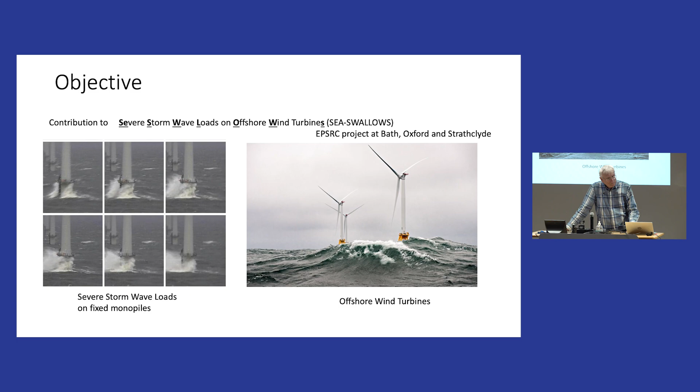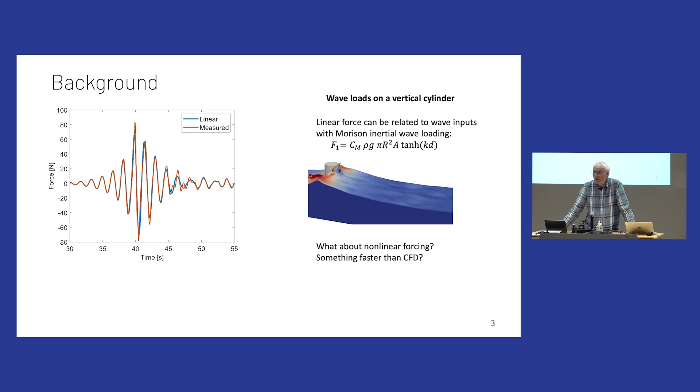But that's not quite everything that one wants. There's nonlinear terms, nonlinear forcing, and we're interested in a process which is faster than CFD. I mean, the classical problem for CFD to solve is flow around a cylinder, and it'll do a very good job these days. But the problem is you need large amounts of computing and you need to be patient. So what I'm interested in is coming up with a much faster recipe.

Why do the higher order terms matter? Well, they matter because of structural dynamics. So if you look at the picture on the left, the linear force time history in blue and the nonlinear terms add on. They make the transitions faster, they make the peaks a bit higher. They don't look on the left as though they do that much, but if you look at the frequency content on the right-hand side plot, that's a force spectrum as a function of frequency, you can see the wave peak well below the shaded area.

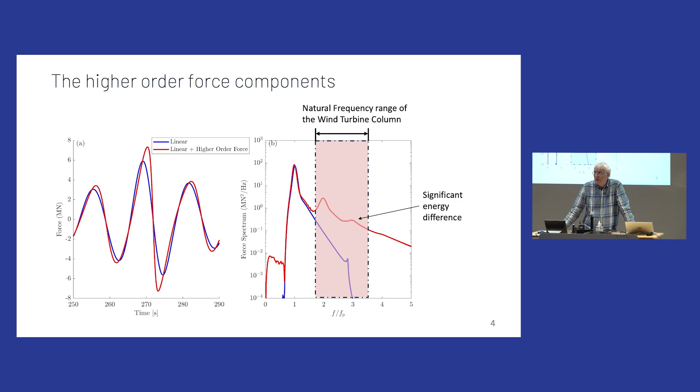The shaded area is where the resonant frequency of the turbine columns are, typically somewhere between 2 and maybe 4 or 5 FP. And you can see some spikes in there. Those are the nonlinear terms that come through from the Morison inertia term when you do the calculations properly, which is what we're trying to do. So you're worried about fatigue as well as extreme environmental overload for columns. At least you should be.

But the key thing to understand is that for the fixed offshore wind problem, turbines and turbine structures have very little structural damping. So if you hit them, they vibrate for a while, and that's clearly going to use up some of your fatigue life in the steel work. And there's evidence from oil and gas from a long time ago that the best analytical models for ringing responses are inadequate. And that's been the case for a long time now.

Okay, so the aim is to take a crude linear representation of the free surface and transform it into as close to fully nonlinear force time history as we can get. And particularly, we want to do this quickly, and we want to do it accurately. We don't want to do CFD, because CFD takes hours on a big supercomputer. We want a force transformation which will give me the answer essentially within 0 computational time.

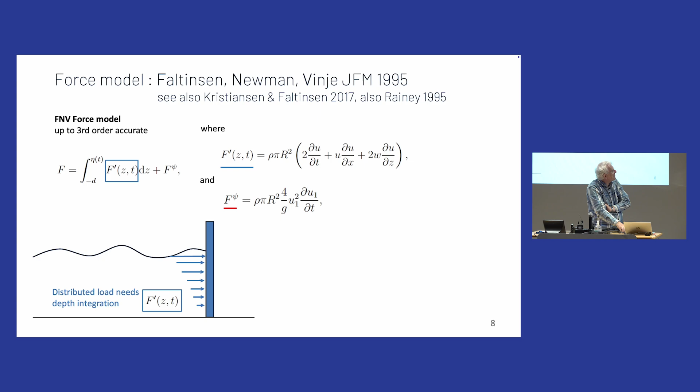Okay, so the depth integral term, the term in blue, needs to be integrated up the column. And the point load obviously is applied to the free surface. Now, the difficulty with most of this is that we can measure what the free surface is doing very easily.

You just stick a wave gauge in the tank and measure eta and then d eta by dt and anything you want from that. But it's actually quite difficult experimentally to measure internal wave kinematics. It can be done, but it's expensive and time consuming. And it's relatively computationally intensive to work them out below the free surface. And apparently, in order to work out the integral of f prime, I need to do a depth integral.

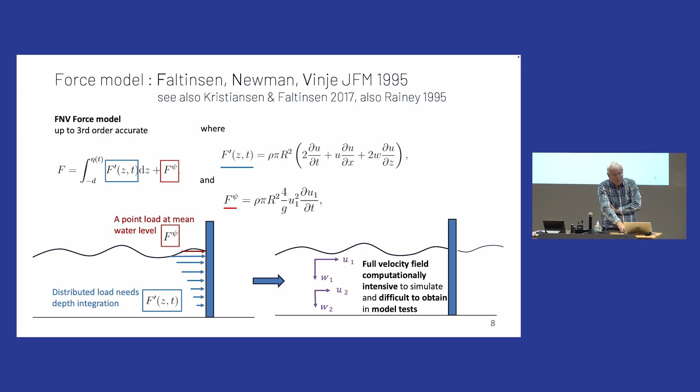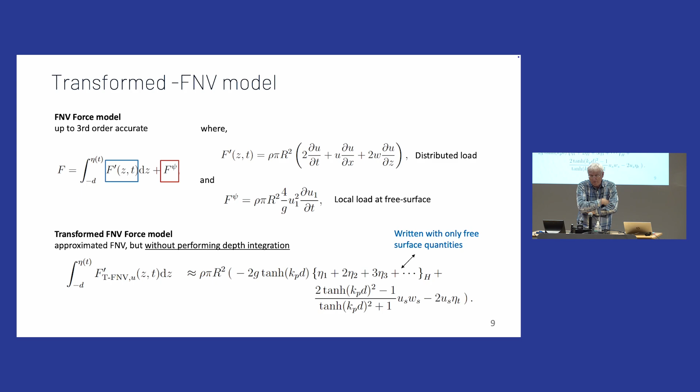So that's the point of the work that Tim Tan and I did. We're trying to eliminate the need for that depth integral term. Okay, that's the answer we came up with, and don't worry about it. It looks horribly complicated, but the point is it is simply properties written at the free surface. So the depth integral is effectively done analytically. And I'd like to explain how that's done.

Okay, so we've got two pictures here. The picture on the left is completely undisturbed. The column is in the middle of the domain. And I've shaded in blue the patch of water beyond the column. The picture on the right shows flow past the column associated with a wave disturbance propagating by. So U of z distributed vertically drives eta of x and t.

Now that's really important because I can use mass conservation. Any fluid that goes in past the column into the right-hand part of the domain, any U is automatically directly associated with motion of the free surface. If you push volume in, the only place it can go is move the surface up and down beyond that point. So a depth integral of U dz is related to the motion of the free surface beyond by simple mass conservation. What goes in one way must come out somewhere else.

And that is the key to what we've done. It's a very, very simple property, but it turns out to be very useful because we know a lot about what the surface is doing. We know much less about the detailed structure of U.

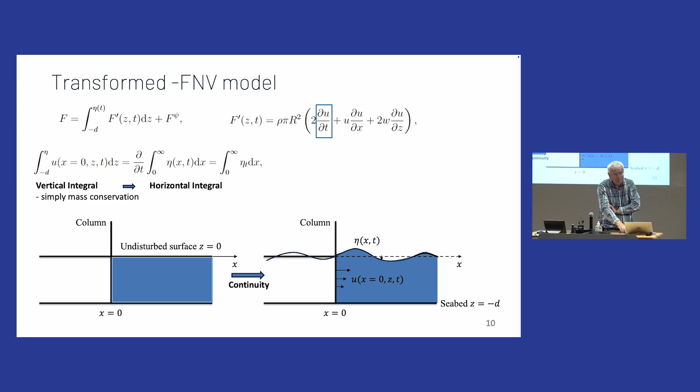So the integral of U dz is equal to d by dt of, so it's the vertical velocity of the free surface, essentially. We don't actually want the integral of U, we want the integral of du by dt, so the fluid acceleration, so we simply differentiate the equation on the left. So d by dt of the integral of U dz is the term I actually want, du by dt dz integrated vertically, plus an extra correction term.

And that is simply the vertical acceleration of the surface integrated from the column out to plus infinity to capture all the wave field. And this simple transformation seems to pass people by. And it's really the key to doing these sort of calculations in an extremely rapid manner.

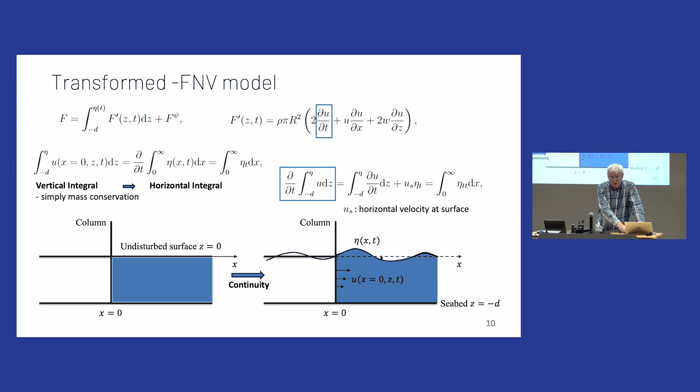Okay, so in principle, we can do this transformation. We know a lot about the surface, so I'm going to write the surface as eta in the middle of the screen. Eta is equal to eta 1. That's just linear. So if the linear surface is A cos omega t, that would be that term. Then there's the second order term, which is A squared cos 2 omega t. And the third order term, which is A cubed cos 3 omega t.

And those are the well-known Stokes bound harmonics. They make crests and troughs different shapes and so on. But their structure is very well understood. And if you look at the narrow-banded approximation, don't worry about the constants. We've got eta 2, the shape of this double frequency contribution, is equal to eta 1 squared minus eta 1 Hilbert squared. Who knows what a Hilbert transform is?

As a few of my students do anyway.

If you start off with cos omega t and you take the Hilbert transform, you simply get sine omega t. It phase shifts everything by 90 degrees. The great advantage with the Hilbert transform is it's a one-line command in MATLAB.

So if you look at eta 1 squared minus eta 1 Hilbert squared, that's cos squared minus sine squared. For those who can remember their school trigonometry, cos squared minus sine squared is cos 2. So by simply doing that operator, eta 1 squared minus eta 1 Hilbert squared, I get a second order term. I get my right second order term.

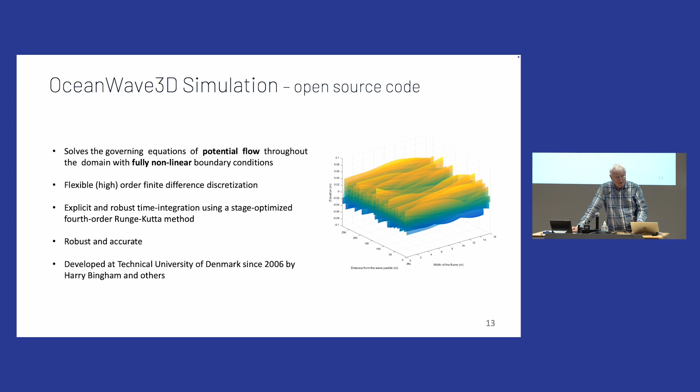Extremely smart mathematician. It's a beautiful code. It's extremely robust. It's very hard to break the code, which for a wave evolution scheme is quite an achievement. Its properties don't matter, but we've used it to infer internal kinematics so we can test our algorithms. I'll show you a few pictures like this. I'll go through them very quickly.

We have an equation at the top that I'm trying to model, and I'm going to compare the first term, which will be a numerical depth integral, to the various approximations in terms of my horizontal free surface formulations. The column on the left is finite depth, so it's KD about 1, so it's appropriate for a fixed offshore wind turbine.

KD 3 would be a big concrete platform in deep water in the northern North Sea. So we have in the top panels, the top pictures, the black curve is the surface elevation time history, and then the colored curves are different methods of approximating the various forces that come out.

So the first thing I'm going to do is compare the numerical integral over depth with a numerical integral horizontally along the free surface. And so that's the top. Basically the green line is an approximation, the red line is another free surface approximation, and the purple underneath everything is the exact numerical depth integral. You can see the top lines match really nicely.

Then we've looked at the horizontal integral minus the vertical integral as an error. So the error is about 3% of the peak force. And then the final one is to do the horizontal integral analytically to approximate that. The errors in that approximation are even smaller. So essentially, this validates the equation at the top.

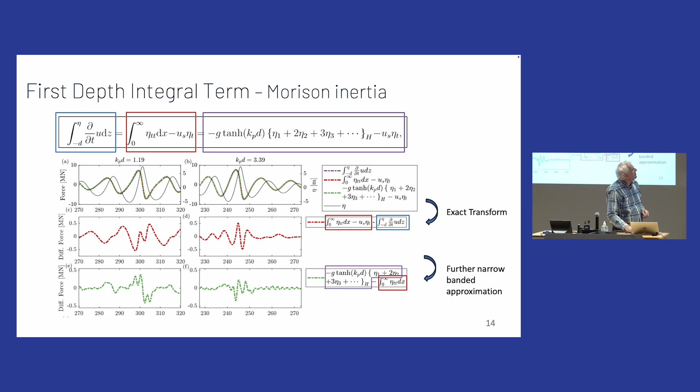There's other terms in the depth integral. There's this u du/dx, which is sometimes called the convective derivative term or convective acceleration. So it fires when there's a horizontal gradient of velocity. So it's a u du/dx, again, depth integrated. A few mathematical tricks based on unidirectional waves: incompressibility and irrotationality connect horizontal and vertical derivatives of velocity fields.

So I'll just show you the answer, that the depth integral of this term can be approximated in terms of a vertical integral of a term which is itself a derivative vertically. So that then becomes trivial. So I'm able to transform my unpleasant depth integral into another term which is only evaluated on the free surface. So that's the convective derivative.

I can also treat Rainey's axial divergence term. So w is the vertical velocity in the fluid column on the right-hand side, and du/dz is the vertical gradient of horizontal velocity. Exactly the same treatment allows me to write it in a very similar way. And then the pictures below compare the numerical integral with the horizontal or the free surface forms. Again, they match really nicely between modeling and the integration.

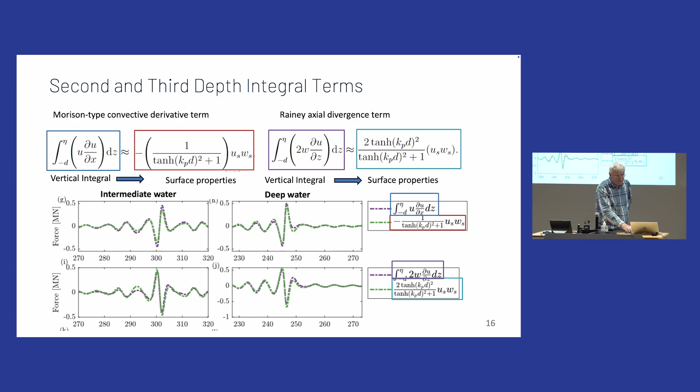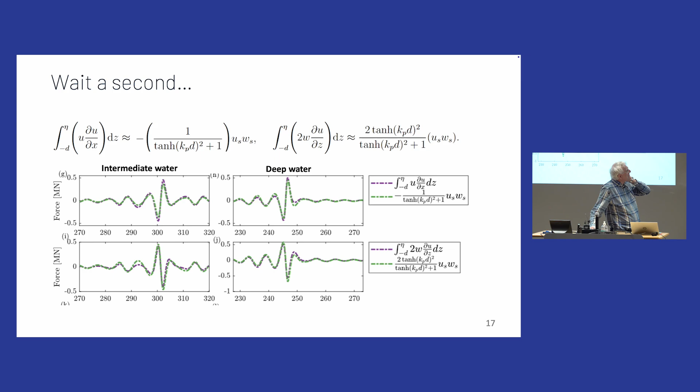But you might look at these and think, well, actually, the top terms are the convective derivative. The bottom terms are Rainey's axial divergence term. When Tim produced these numerics for me, I looked at them and thought, they look suspiciously similar to me. They're almost identical, but one's the inverse of the other. So nature's being kind to us.

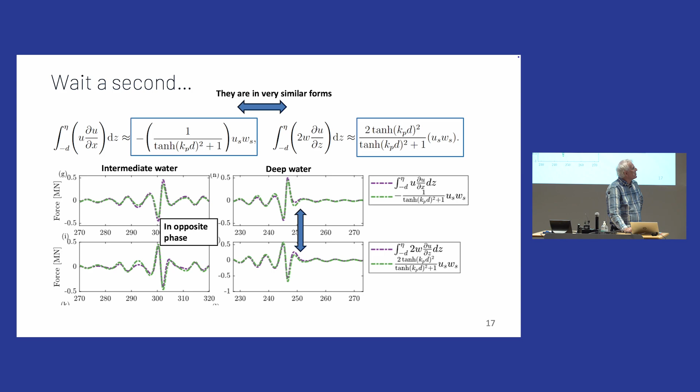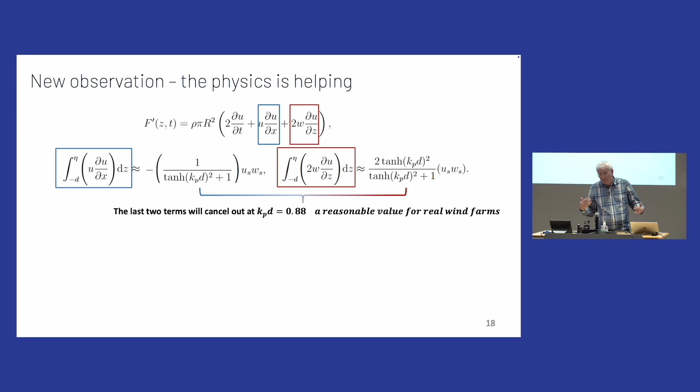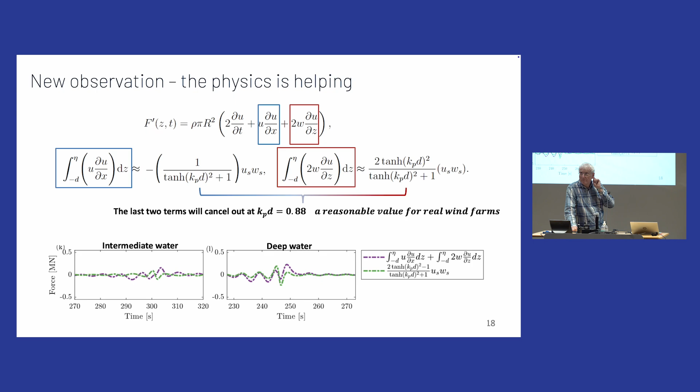Those two terms almost exactly cancel out in realistic water depths for offshore wind turbines, which is very convenient because it's a bit messy to play with these terms. If I don't need them, I can just throw them away. That's just a comparison to show the residuals to the left. The peak force is about 10 meganewtons, so my errors are about 1%, which is acceptable, I think, for engineering use.

Okay, so what we've been able to do is take the complete solution for the depth integral term, f prime, and express it completely in terms of free surface properties: the displacement of the surface eta and the horizontal and vertical velocity of the surface. So u_s is the horizontal velocity on the surface. Eta_t is the vertical velocity of the free surface.

At each harmonic above linear, the FNV forces are relatively larger than the same harmonics in the incoming wave field. Actually, FNV is as nonlinear as wave slope is, and wave slope is quite a nonlinear parameter. That's why the harmonics are quite large, and why the structural vibration induced is quite important.

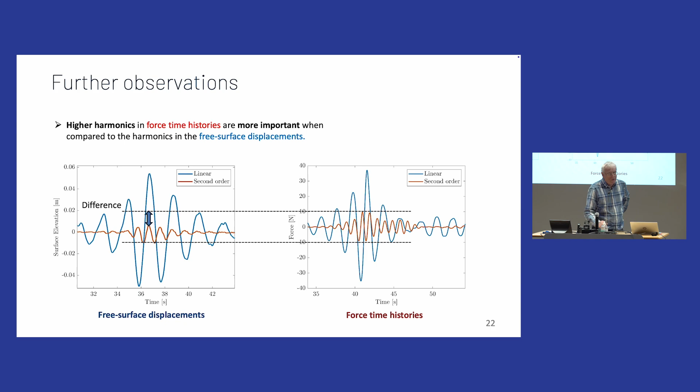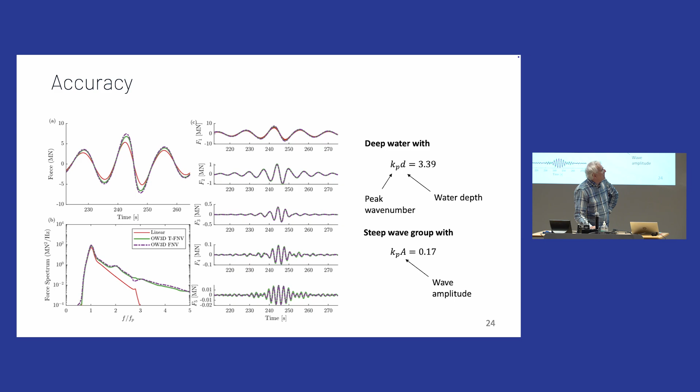That's a shallow water case. It works equally well for deep water, which is quite satisfactory. Okay, so this is the complete answer, at least 2/3 of the way to the complete answer, perhaps. The depth integral can be written in terms of motion of the free surface. So U throughout the column has been transformed to eta along the surface. And the only other bits to the left are free surface velocities. So U, W, and d eta by dt. Well, we know d eta by dt because we can get it from eta.

So how do I get my velocities to plug into this? It depends exactly what you're trying to do. If I'm doing a computation of the wave field, then I will have free surface velocities as part of my normal output from the scheme. So I would then know the velocity and I can then plug them into the formula to work out loads on columns.

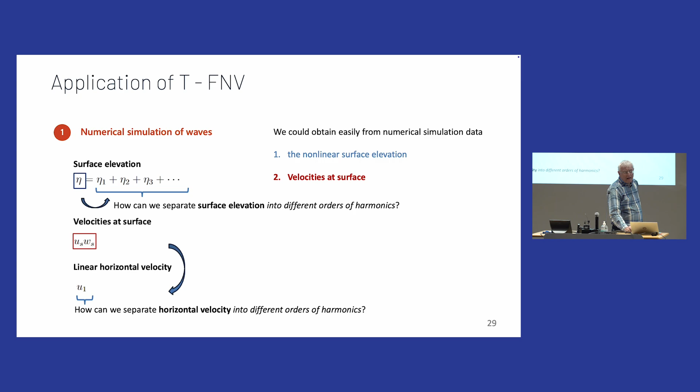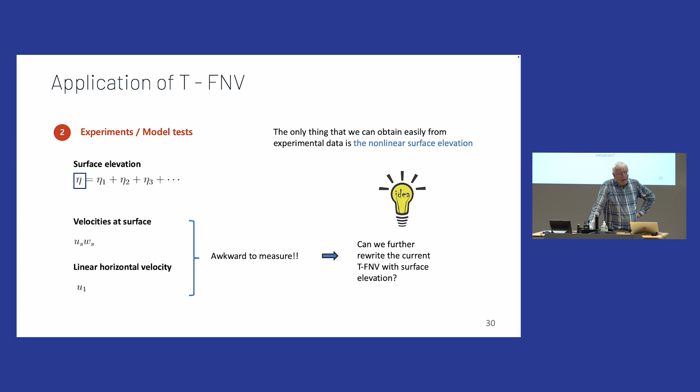I'll skip those. That's fine if I know the velocities, but I don't always know those velocities. Actually, the easiest thing to measure experimentally, and what I would be able to tackle if I were doing random time domain simulation just to do design statistics, is the nonlinear approximation for the free surface. Can I, from that, recreate the velocity field on the surface? The answer turns out to be yes. I won't go through the algebra. The equations are quite unpleasant, but Mathematica is good at algebra, better than me anyway.

I can approximate the horizontal velocity on the free surface that I've labeled U_s Stokes, which is a raft of terms. The first term contains eta 1, that's just my linear approximation. And then there's a term M2, which is actually a second order term. So it's eta 1 squared plus the Hilbert bracket. And then there's a third term labeled M3 at the end, which is the third harmonic contribution. That's as far as I need to go because I want third harmonics included all the way through. So that's how I can get a relationship between the free surface eta and an approximation for the horizontal velocity on that free surface.

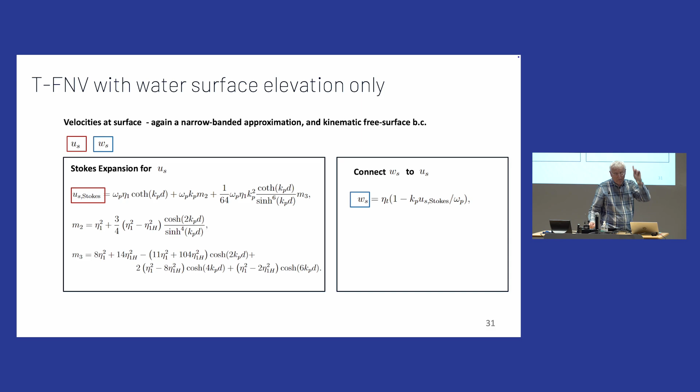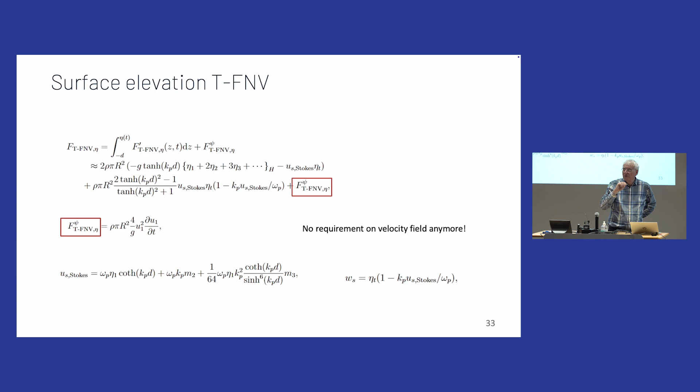So what this means is that if I know the free surface, I have enough information to do absolutely everything. It looks horrible, but a Mathematica script you can program up in about 10 lines, as Jana will vouch because she's done it. Okay, so key point is that if I know the free surface, then I can get everything out. Now the proof of the pudding, as I say, is in the eating. Does this actually work if somebody is kind enough to go and measure forces for me in the lab?

So a little bit on wave groups. Now, for those who are interested, this is a beautifully focused new wave. Symmetric wave group forming at a particular point in space and time. And you can see different color plots here. Concentrate first on the blue one. That has the maximum possible crest at the focus point. The other colors are what happens if I add on 90 degrees, 180 degrees, and 270 degrees to the phase of everything.

So if you then look at, if you go from blue to, say, brown, that has put in 180 degrees. So that gives me the deepest possible trough ever associated with this concentration of energy. New wave is very, very useful.

I mean, we developed it in Shell as a design wave, which gives a very, very high load on a space frame structure in the Morison drag term. Very high horizontal velocities are associated with very tall crests. So you want as much energy to produce as much surface elevation as you can. It only lasts a few periods. It forms and then falls apart.

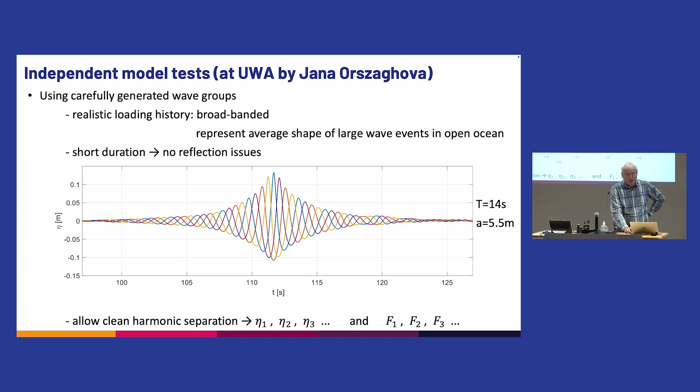So for those who have not been to Shenton Park, this is the wave flume that was built about 3-4 years ago, I guess. Hugh spent a lot of his time organising the construction of it or the rebuilding of it. So the waves, we have paddles. We can either have a piston paddle, which is basically a vertical plate that oscillates horizontally. That's very good for relatively shallow water waves. And of course, the monopile problem is a fairly shallow water wave problem. We also have a bottom hinge paddle, which makes effectively shorter waves, i.e. equivalently waves on much deeper water.

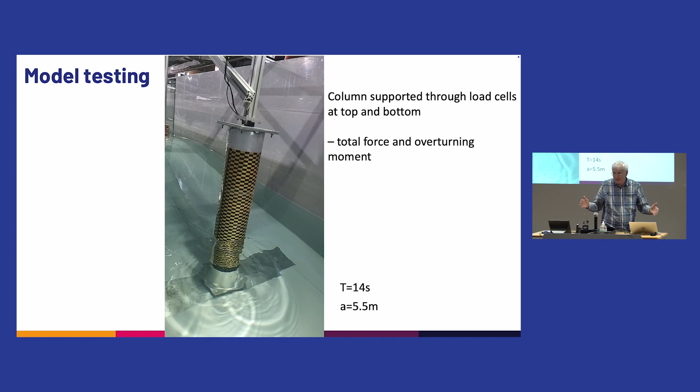Another advantage with the new wave is that obviously waves are scattered off this column. They go out to the walls, bounce off the walls and come back in again. But again, they come back in after the main interaction is finished. So you can do effectively open ocean experiments in a relatively narrow wave channel. Again, it's an advantage of the new wave form.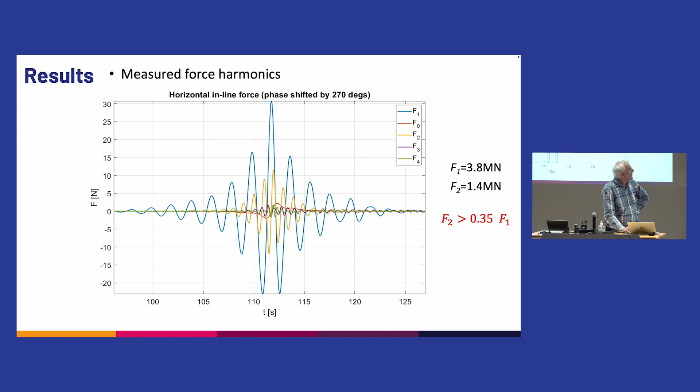So this matches what I said earlier, that the entire force time history is related to the slope of the incoming wave. They are essentially a single constant. So this is the ultimate proof of the pudding. We have a measured force time history in blue, and we have a truly linear inertia term, if I didn't consider any of the harmonics above the linear behavior, in brown. And you could argue they match, but they don't actually match very well.

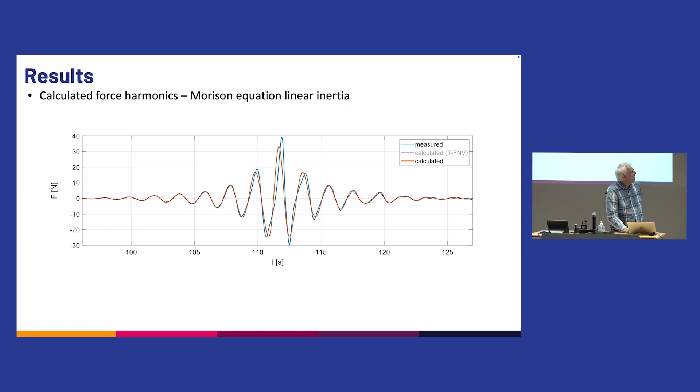If we put in the second order sum and difference, the third order sum, fourth order sum, fifth order sum, you get that level of agreement. So let me just flick between these. So that's really not very good. That, as far as I'm concerned, is fantastic. So this is purely processing experimental data, but in this theme of the FNV model. So this is really beautiful validation of the theory, which I hope we'll publish soon.

Okay, some conclusions. We propose a simple transformation of the well-known FNV model, which expresses the total force on a cylinder solely in terms of nonlinear kinematics on the surface. We propose a second approximation that does TFNV only in terms of the free surface displacements, which are easy to both measure and simulate numerically, very fast to simulate numerically.

The new formulation shows the importance of the high harmonics because of this weighting towards high frequency. The scheme is incredibly robust. You can't break it, essentially. It's accurate and it's incredibly efficient. And that's actually really important because the guys who design offshore wind turbines want to simulate every wave this thing's going to see. They want to run 1 million waves as part of the design process.

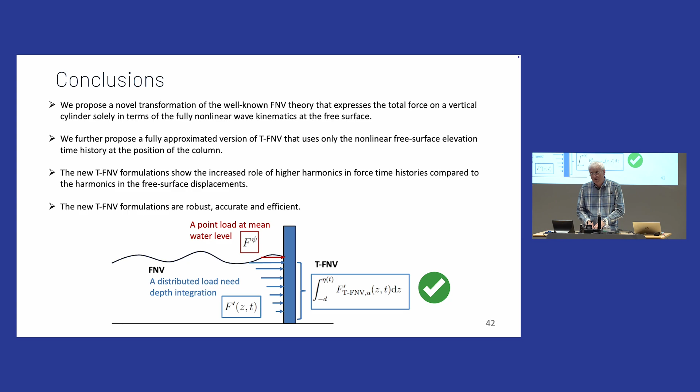You cannot do that. You might be able to do 1,000 waves if you do CFD, but more likely 100. This process will allow you to do all 1 million. So if you want accurate loadings, both for your extremes and for your fatigue calculation, this is the route to go.

It's published in a paper that came out this year in Coastal Engineering. The background for phase manipulation is in the paper that Colm Fitzgerald wrote when he was in Oxford with us. And the first idea of decomposition in terms of harmonics was published in JFM with Li Fen Chen, known to you all, and a few other suspects down the list.

I would say, finally, if I could just make one final remark, safety for offshore wind should be an entirely different set of calculations from safety for oil and gas offshore. What is the risk of offshore wind? You lose one turbine out of a field of, say, 100. I really don't care. Over the lifetime of a field, say 30 or 50 years, I don't care if you lose 10% of the turbines. You'll still make a lot of money. You'll make more money than if you over-design them so they all survive 50 years. The design standards probably are not going to reflect that, but should.